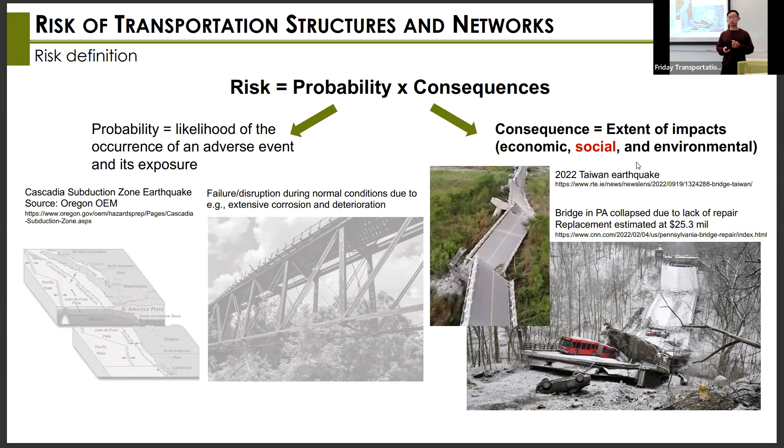The figure here shows some of the failure consequences under hazard. One is from a natural hazard, the recent earthquake in Taiwan. The other is a recent structural collapse in Pennsylvania near Pittsburgh due to lack of attention for structural maintenance. We see that there are a lot of social consequences attached to the failure and damage of civil and transportation structures.

So also what we are looking at today is not only isolated for a single structure. This is based on the fact that we know as a transportation network, all the assets are interconnected. So the failure at one infrastructure asset, for example a key bridge, will have a dramatic impact that propagates through the entire transportation network. For example, here is the aerial view of the river crossing bridges near downtown Portland.

You can see this is a typical Monday afternoon rush hour travel pattern. As you can imagine, if one of those bridges has some service disruption, there will be some consequence in this travel time for all the travelers within the city and across the cities as well. So this will be the focus, the scope of this talk.

So how do we first quantify, assess this risk at the transportation network level, and how do we improve our transportation systems so that this risk can be minimized?

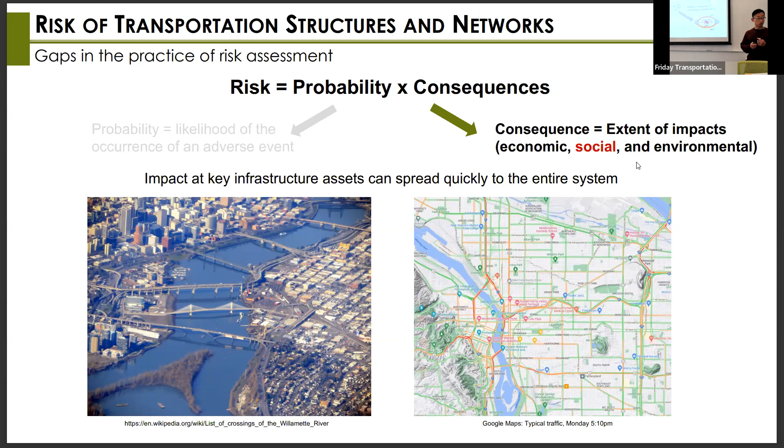First of all, traditionally, this risk assessment was usually carried out, at least for civil structures, at the asset management level. This has been traditionally how, say, Department of Transportation has been managing and analyzing the potential risk. This type of risk assessment approach is based on the assumption that network performance, meaning the travel time in the transportation network, can be reasonably approximated by aggregating all the asset level performances.

So basically you see how many travelers are going through one bridge and then use that as a surrogate for the transportation performance for that bridge, and then you add that potential risk to these impacted users across all the bridges in your stock. So that's how you evaluate the societal risk at the asset level and translate that to network level.

However, as I mentioned before, the transportation assets are actually interconnected. So here I'm showing a specific toy example to illustrate this point in a more quantified way. Suppose you have this very simplistic transportation network from the origin A to the destination B. Originally, if nothing is happening to your transportation structures, you have some traffic on each of the possible links. We assume that in the middle link, there is a bridge.

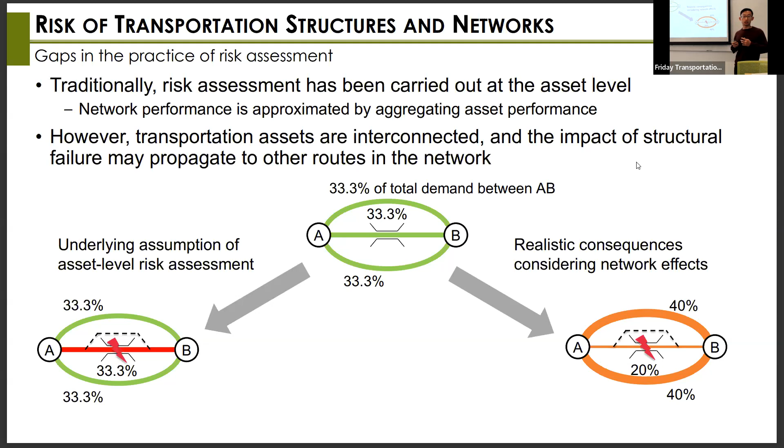However, in reality, this is not necessarily the case if this bridge fails and people have to choose a detour route through a local road with a smaller capacity. What people actually will do is choose the other route with faster travel speed or faster travel time. So you see not only the travel time on this damaged link will be compromised, but because people choose the other routes, the travel time on those links will also be impacted, affecting the other users who originally also used the top and bottom links. This is an intuitive view of why this traditional way of doing risk assessment by aggregating asset level performance may not be the best way to evaluate transportation network risk.

So what type of performance level do we usually talk about in a transportation network? This will include connectivity. This type of performance tries to see how many independent links connect one origin and one destination, and then you count those across all the origin-destination pairs.

The other type is slightly more complex, talking about the capacity side of the transportation network. Here you may be interested in the maximum capacity from an origin to the destination, whether it be commerce, freight, or just commuters. The third type considers both the capacity side of the network as well as the demand side of the network.

So not only do we consider what is the capacity from origin to destination a network can carry, but also given the traffic demand of people moving from an origin to a destination, how those people will choose their preferred route to achieve their trips. So computationally, from connectivity to travel time, you need more and more information in order to do the analysis, and also there will be more complex algorithms involved in order to quantify those network performances.

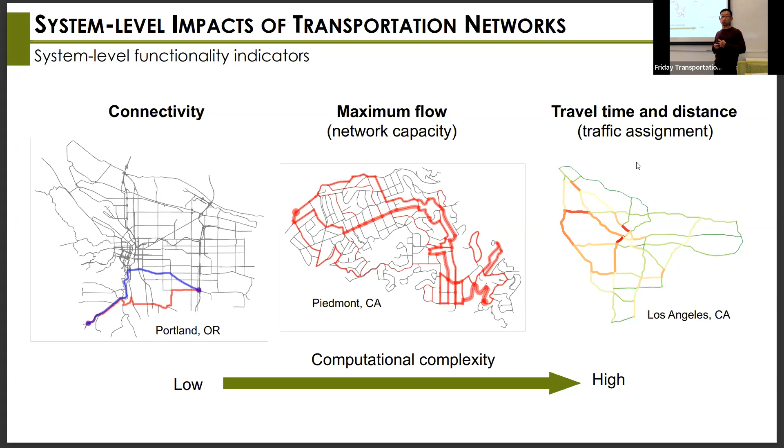So we will come back to this three types of performance measures later on when we are trying to actually do network level risk assessment. But these are the three things when you do risk assessment at the network level. Those are the three indicators you can use to see what is the transportation network risk and hazard.

So why does it matter to do a risk assessment? The risk assessment is important because it has some indications for infrastructure management. So specifically, risk reduction is usually defined as some type of benefit. If you do a bridge improvement work, that will reduce the risk of that bridge failing, right? So the difference of that risk will form the benefit of your project.

Of course, no project will be free, so there will be a cost for that project. So for each project, you will have value, you will also have cost of that action. So for a risk manager or infrastructure manager, what they a lot of time want to do is to find the best set of projects that they want to do in order to maximize the total benefit, whether it's only agency benefit in terms of risk reduction or both agency and societal benefits.

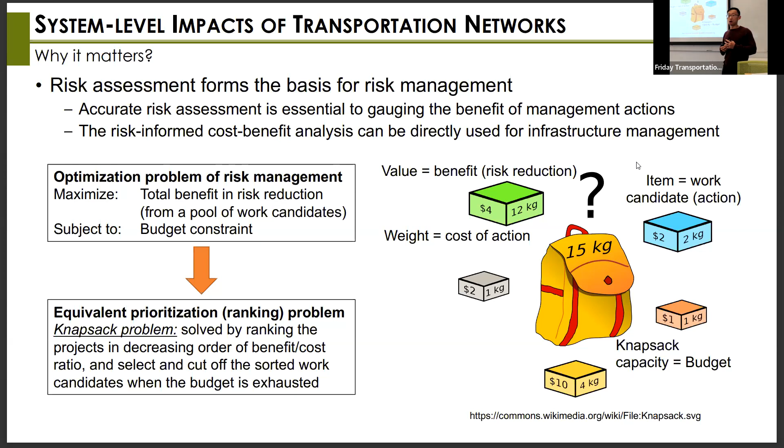Okay, so this is usually in operations research formulated sometimes in a knapsack problem. So essentially, this will be the way that you can choose which project you need to do by comparing and ranking what is the benefit to cost ratio of different projects. So rather than doing a really involved optimization problem, you can just rank all the projects in terms of benefit and cost, and then choose the best way to move forward to improve your infrastructure system, meaning to reduce the risk. So accurate risk assessment is crucial in that aspect, it will directly tie to how projects are ranked and selected and those kind of things.

And another thing why risk assessment should be in the picture of people's mind is some of the current conditions for our infrastructure, especially transportation infrastructure. So first of all, we have a massive amount of deficient structures. The latest report card from ASCE states about 7.5% of the US bridges are structurally deficient. So this translates to a lot of travels every day going through these structurally deficient bridges.

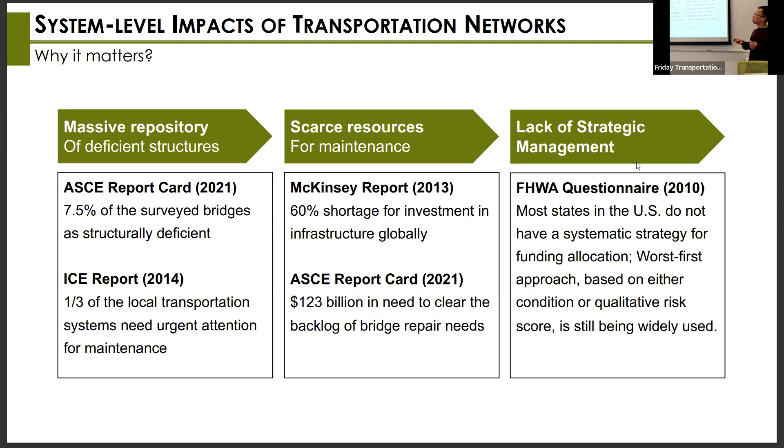But on the other hand, for a lot of the agencies, they don't have a very consistent and objective way of allocating the limited resources. So finding a better way to quantify your risk, and risk-based benefits, will improve this situation. So that's why another aspect of why it matters. And so that's the national and international situation.

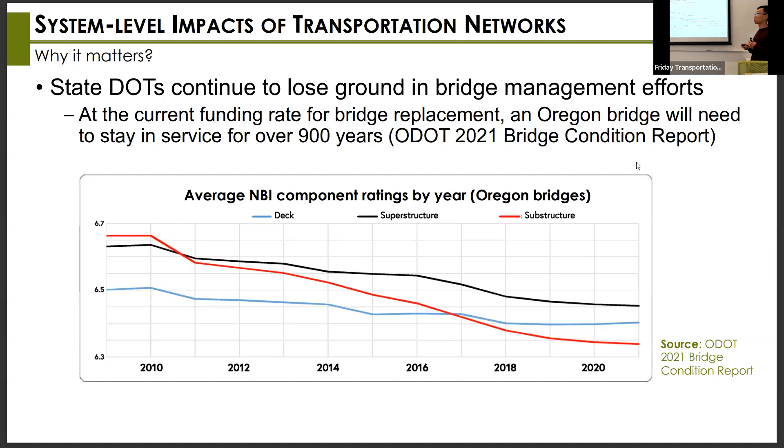So this slide shows the local situation here in the state of Oregon. Based on the 2021 bridge condition report in the state of Oregon, based on the current bridge replacement rate, meaning how many percentage-wise bridges will be repaired every year, the estimate is a bridge should have to stay in service for over 900 years before it's due to be repaired. The design service life for bridges nowadays is 75 years. So there is a huge discrepancy there. That means a lot of resources have to be put into sensible maintenance actions in order to keep our infrastructure system safe.

So those are some of the backgrounds and motivations and kind of why this type of research matters in reality. So the first thing that I want to introduce is to demonstrate through research what's the difference between a project level risk assessment that has traditionally been conducted by the agency and a network level risk assessment, and how those will impact the ranking of different bridges. As I mentioned before, the ranking will have an implication on what type of projects should be selected. So yeah, and this part of research was published in ASCE Journal of Infrastructure Systems.

So here's a brief overview of the methodology of this study that has been conducted. We built a deterioration model using a Markov chain, because if we're trying to design maintenance actions or evaluate the risk of deteriorated structures, we first need to know how the structure deteriorates.

The second thing is to use the travel time within the network to evaluate the risk, and compare that with the risk-based ranking using some other performance indicators.

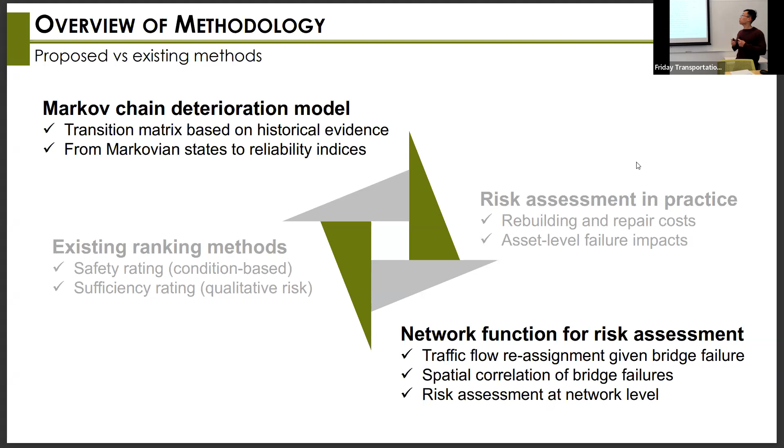This slide shows the building of a Markov deterioration model, where the infrastructure condition, in this case the bridge condition, is quantified using condition ratings from 0 to 9, based on the federal highway protocols.

To model deterioration, we use this Markov model, which assumes that each year there is a probability a structure will stay in its current condition rating, and another probability that it will deteriorate into the next worse condition rating. This is a simple mathematical model to see, at the bridge network level with many structures, how deterioration is manifested by the condition ratings.

To get those transition probabilities, we leveraged the National Bridge Inventory data, which gives transition frequencies from one condition rating to another, at least from the year 1993. The data starts from 1992, but to know the transition you need to know what's happening in the next year. With that, you can estimate the probability of a structure moving from one condition rating to another.

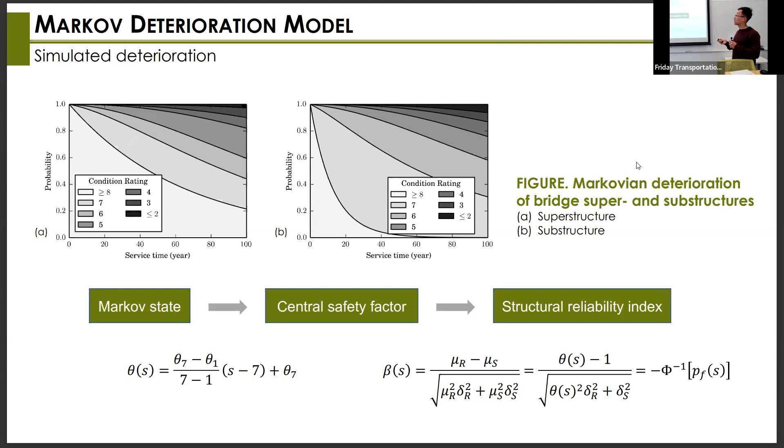So let's see some of the results. We use this network-level risk assessment on an illustrative transportation network. The purpose is to showcase the top 10 bridges in terms of their bridge ranking, and what will be the impact of those bridge rankings based on different performance indicators and risk indicators.

Here we are analyzing this transportation network - a highway transportation network in the county of Los Angeles, where we have 91 highway bridges with 66 links. The flowchart here is a summary of the methodology I briefly touched upon.

Essentially, we are using the National Bridge Inventory data, which gives all the condition ratings and the time series of those condition ratings, so we know how bridges deteriorate and how likely they are to fail.

We also have the GIS data of this region of interest so we can build the transportation network, and the census data within this county so we know the traffic demand from different neighborhoods. With that traffic demand and the network model, I can assign traffic flow to different links to know the typical traffic pattern within this highway network.

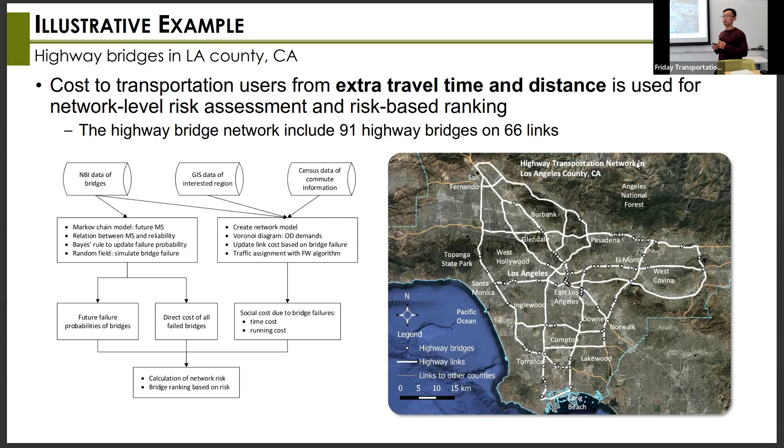Another thing I mentioned before is the indicators we're using for the risk assessment. We are comparing different indicators to showcase why it is important to rank bridges based on their network level risk. The first indicator we follow is the structural adequacy and safety.

You can consider this only as the likelihood of failure of an asset. This doesn't consider any consequence of a structural failure.

The second indicator is sufficiency rating. This considers both the current likelihood of structural failure as well as the consequence of that failure. However, this is a so-called qualitative indicator where essentially an expert panel decides what will be the importance, the different weights of failure probabilities and failure consequences, and comes up with a sufficiency indicator qualitatively to represent the risk of a structure.

Of course, you can do quantitative risk assessment, as I mentioned before. The difference here is you measure the agency and societal risk quantitatively, but you only consider those risks at the asset level, at the project level. You don't really consider how traffic will reroute around a failed bridge—you only assume users will still choose that old route with some local detours.

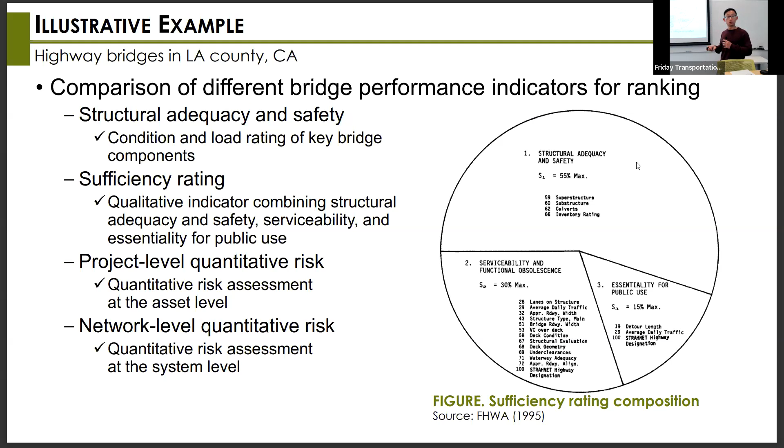The last one, the one we're interested in, is network level risk assessment. This is the result of the traffic assignment. Based on this, we can evaluate the top 10 bridges based on these different indicators I just introduced. The takeaway here is different indicators give you very different bridge rankings.

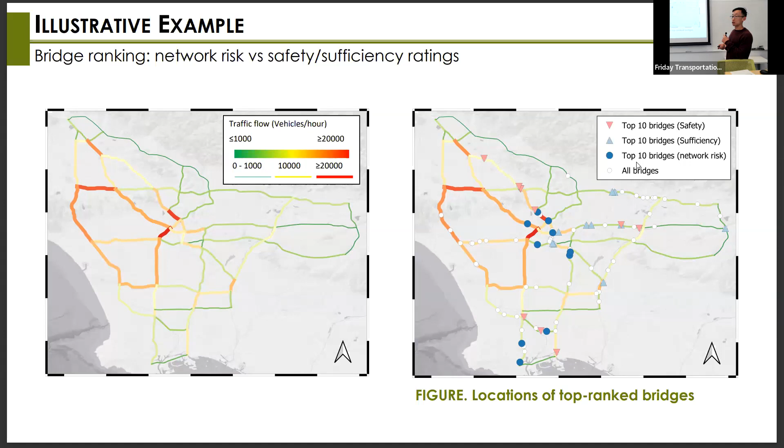The safety and sufficiency rankings sometimes may overlap, but they differ very much from the top 10 bridges ranked based on the network risk we mentioned before.

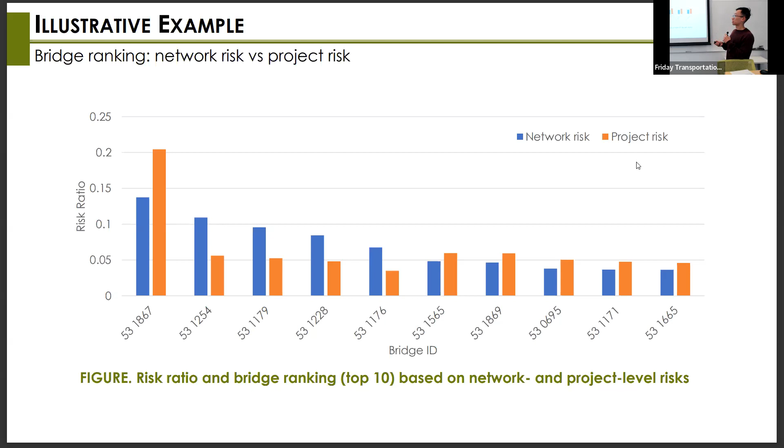So that's risk-based ranking. The second thing is how we can actually do asset management considering a stock of bridges. This is achieved through a concept called deep reinforcement learning, which I'll elaborate on later. This is from two studies we published in ASCE journals.

A little recap here: we have the risk at network level, and now we know this is important. These are the three types of performance indicators we can use: connectivity, capacity, and mobility for transportation users.

Here we choose capacity of the network because that's a sweet middle ground for network level analysis—not too difficult to compute, but still reflects network level functionality. Network risk can then be formulated as the difference between the network capacity of a damaged network and an intact network. I'll move a bit quicker considering the time.

So what's the risk management process in the life cycle of a transportation network? Consider you have a transportation network—this is a sequential decision-making process in the sense that at each decision point, a decision maker or decision-making tool needs to decide from a wide array of maintenance options.

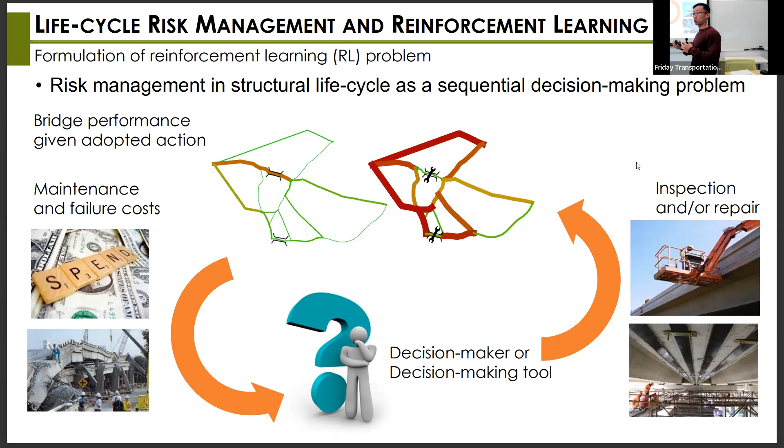So this decision-making scenario in the life cycle that I mentioned before. What you see here is just considering 5 generic actions for each bridge in a 10-year decision horizon for 100 bridges. This is the number of potential policy pathways that you can have. This is a gigantic number that you cannot really enumerate every one of them and then find the best policy.

So that's why we must do things a little bit smarter. One way to do this is to kind of abstract this decision-making scenario to this diagram that is usually used in dynamic programming or structural control.

So here, that real-life system that will react based on the action you take is abstracted to a so-called environment. And the decision maker or decision-making tool is also called an agent. The agent's tool is at each time step, it will choose an action and apply it to this environment. And that will change in the next time step, the state of that environment, meaning the conditions of all the bridges in the network, and will also incur a cost.

So the flip of a cost is a reward. In the jargon of reinforcement learning, this is also usually called reward. And those state and reward will be fed back to the agent, and then they can adjust their policies and find a new action in the next time step to apply to this environment. So this is essentially a feedback control loop.

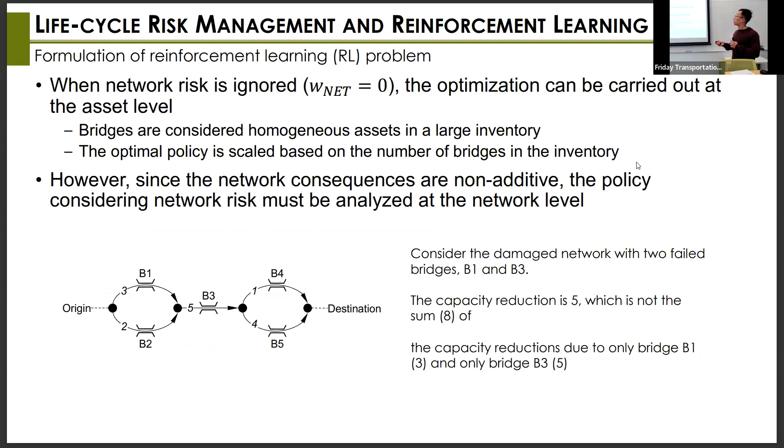So the purpose here is, this environment I showed here, this is in real life. It will not allow me to experiment and try different policies to see which one is best. So what we can do is build a virtual environment and then build an automatic decision agent, and then just let it try out different policies to see which one gives the highest cumulative reward, meaning the highest risk reduction. So the goal is that with some algorithm, as this experimentation process goes on, the total lifecycle cost, including the risk, will be reduced. That will be done by training that neural network.

And this is the algorithm specifics that includes gaining experience, that is, letting the neural network agent explore different policies in this virtual environment. And then you have this policy learning process, which is a smarter way of tweaking my policies to improve them, so that my total cost during this training process will be lower. And that means I'm finding a better and better policy.

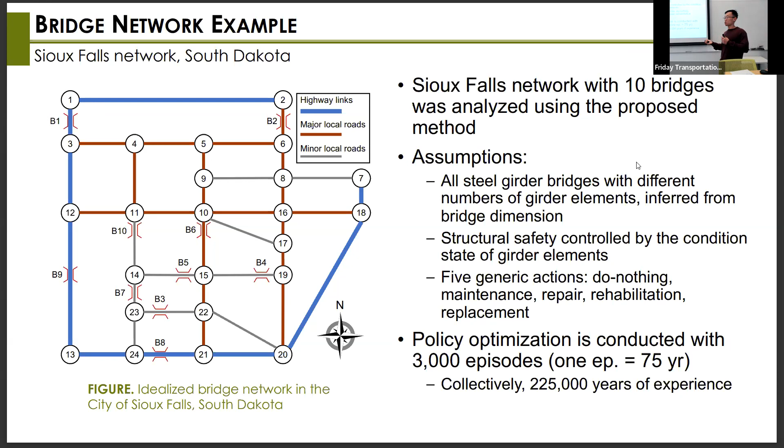So here the policy optimization is conducted through training in 3,000 episodes in this virtual environment. For bridges, one episode is the service life of that bridge, which is 75 years. So collectively, we let this agent experiment over 225,000 years of time. But these are virtual experiments, so each experiment runs very quickly, which is why it's doable in a virtual environment.

And the key thing here is to actually understand the policy developed by this type of algorithm. So if we set the weight to 0, this is the good old dynamic programming problem. You have 5 states, 5 actions, and then you have a best policy given different condition states. So condition state 1, I don't need to do anything. Condition 2, I need to do maintenance. Condition 5, I need to do repair. And over time, you will have this distribution of different condition states.

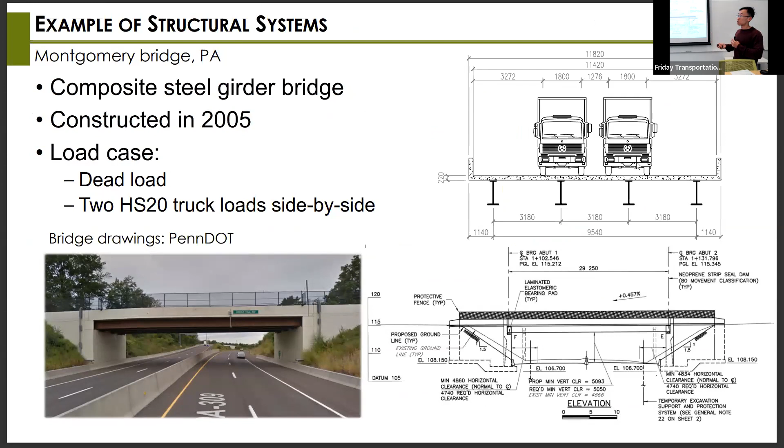So this is the same concept that can also be used in a single structural system. We can develop these adaptive maintenance campaigns for different bridge elements.

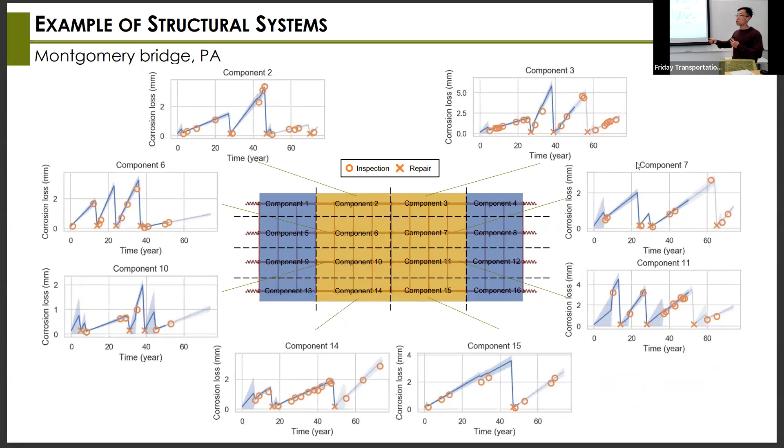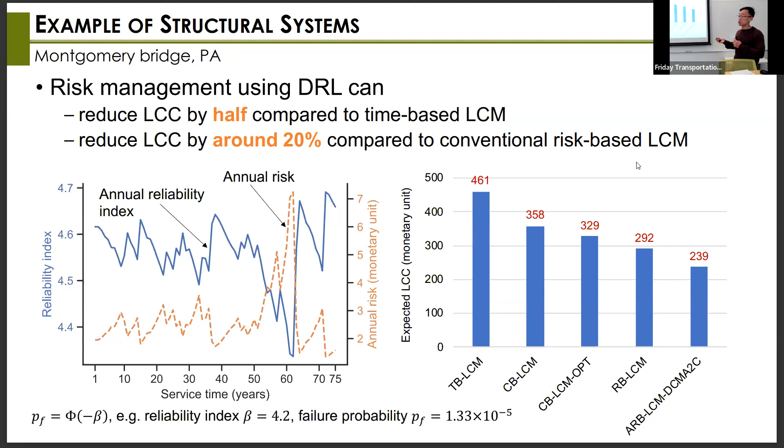And the benefit is we can lower the lifecycle cost of that bridge by about 20%, and also kind of control the bridge failure risk as well.

So in conclusion, at the system level, first from this talk I do want to convey this idea: why we want to understand risk at the system level. The fundamental reason is all the transportation assets are interconnected, so you have these rippling effects when one structure fails.

And the second thing is the conventional preservation policies based on element level risk assessment may not give you accurate risk assessment results, the risk values. That's the first part of the presentation. We see that the top 10 bridges ranked based on different indicators may differ drastically.

So the second thing is, we know the importance of doing system level risk assessment. Then how to manage system level risk, considering the fact that when we are doing system level risk assessment, the amount of system states explodes really, really quickly as the network grows.

This is solved by a technique called deep reinforcement learning. So we will build a virtual environment for an agent to experiment and then find best policies over time. And then also represent those policies in neural networks so that it can continuously improve the quality of the policies.

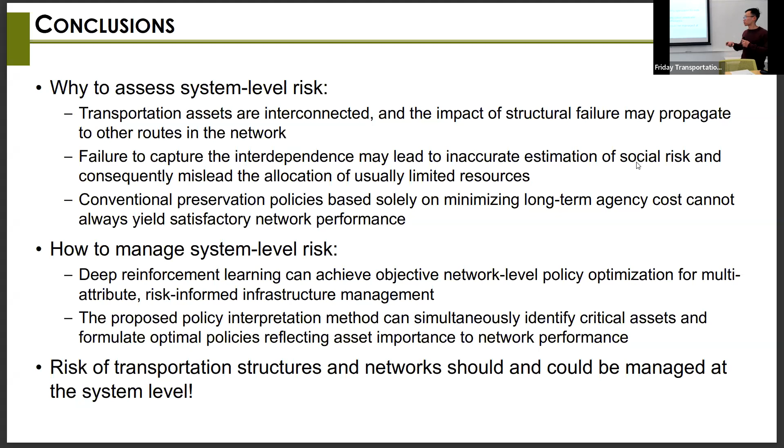All right, so that's all from my presentation, and I'm happy to answer some questions. Thanks.

So how are we going to do this? Yeah.

In the first paper, I'm wondering what was the correlation between the network derived risk assessment and the project? How close could you get if you just had the project information and you were like a small DOT without the expertise to run a network?

Yeah, that's a really good question. That really depends on the topology of your network. So if you have, say, very closely connected networks, the impact of individual assets will probably be intertwined with other things. On the other hand, if the connectivity is different, you will have a very loosely correlated performance correlation

between project level risk and network level risk. So we did some numerical experimentation. The key factors could be the average degrees of node degrees within your network. And it will also be dependent on the probabilities of failure of different links. It will also somewhat relate to the

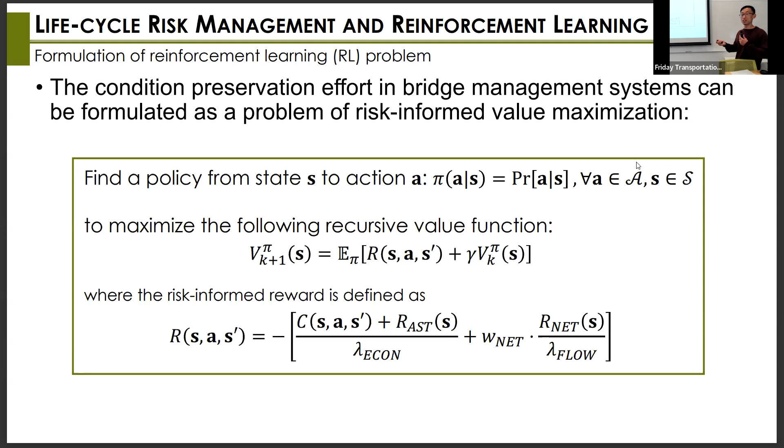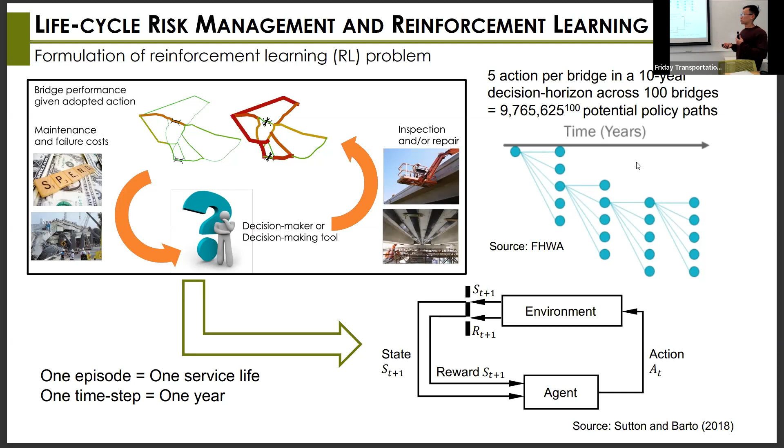For asset management processes, this actually naturally occurs based on the real interest rate. The key difference I want to draw is between nominal interest rate and real interest rate. You want to use the real interest rate to formulate this discount rate rather than the nominal one. So that's why there are some difficulties formulating this decision-making process as a reinforcement learning process, but there are also some advantages for asset management problems that don't appear in traditional robotics applications for reinforcement learning. The second question is about the uncertainties.

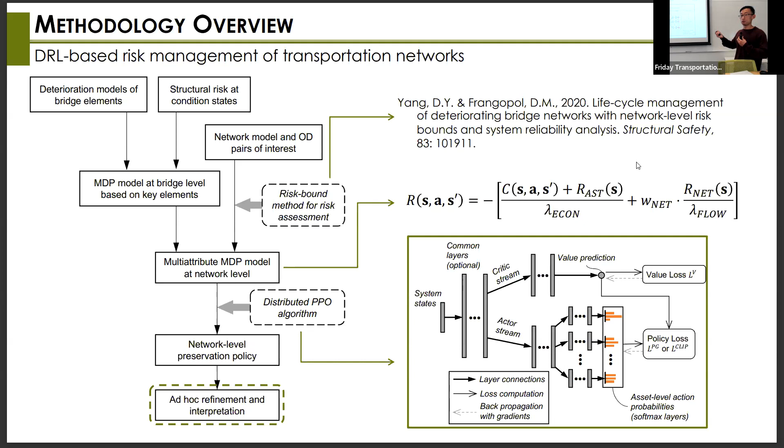So you have uncertainties within the system dynamics, meaning how the system will deteriorate over time—that's a Markov process. You also have uncertainties of system performance. Here I have two comments. For system performance, you can find non-simulation based approaches to evaluate the risk at the system level, so you don't have oscillation because of uncertainties within the reward function.

One example is the approach we proposed for network level analysis. Many other researchers also do non-simulation based approaches to get the risk reward function. The other thing is this type of comparison between a benchmark dynamic programming solution and a network solution, to make sure you are okay with whatever the neural network is giving you, and to be cognizant but also content with what the algorithm can do.